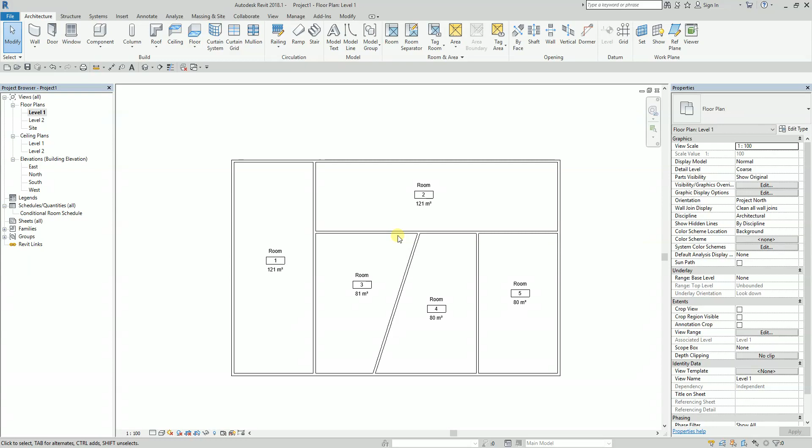Okay, so as you can see here, this is, let's say, my old project. So as you can see, like my last exercise, I do have here a conditional room schedule that shows some required area wherein you can type the value, and then the checker here, and then the percentage of total. Okay, so this is actually the last schedule that I created last time. If I check here the fields, here's the field. So I do have here the required area, which is this one.

So if I check here the parameter, I just created a new parameter named required area, and the discipline is common, type of parameter is area. And it's under the rooms. Okay, and it's an instance. So that is for the required area. I just changed the name here to client's required area, so you can type in here the value. And then this is actually the default field, the area from this portion here. There you go, there's the area. I got it from here.

And another custom field here is the checker. So if I check that one and edit the parameter, as you can see, this is the name of my calculated value, and then this is the formula. So the formula says that if the required area is less than the area, the checker will put OK. If the required area is more than the area, the checker will put X, colored orange. Okay, so this is actually the schedule that we created last time.

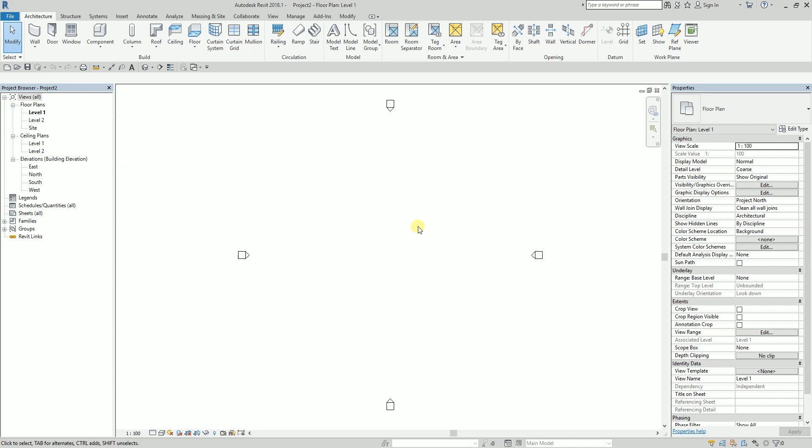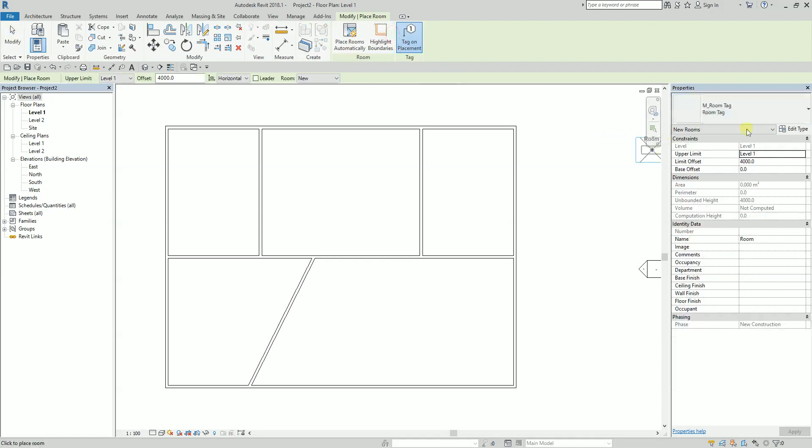Okay, now to be able to copy that, it's not that difficult. Let me just first create some walls, and then after that I'm going to put some partitions. After I put the partitions, I'm going to include also the room. Okay, so there's a partition, and then from room and area, I select room, click the drop down arrow, so there's the room tag with area. Let me just place it here, here, here, and here. There you go.

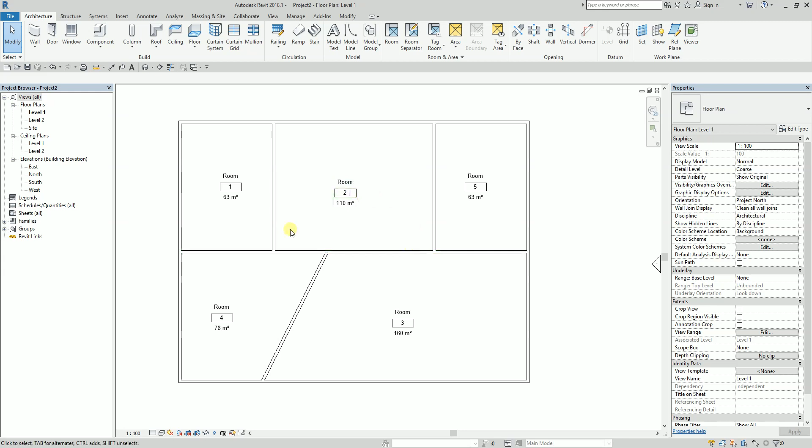Now I want to have the schedule like what I have in my last project, which is this one. So you just need to simply right click the schedule. If you want to copy this, just right click and you can see there copy to clipboard. It's not difficult. So just copy to clipboard and then go to your project 2, which is this one. And then the next thing that you need to do is go to modify and look for paste from clipboard. Okay, there's an issue here if you select the 3D view.

Okay, so paste from clipboard is still there. Before you'd not be able to find it, but I think in this new version you'll be able to paste it now, even if your view is on the 3D view. Okay, so there you go. After you copy to clipboard, you go to your new project, which is this one, and then paste from clipboard.

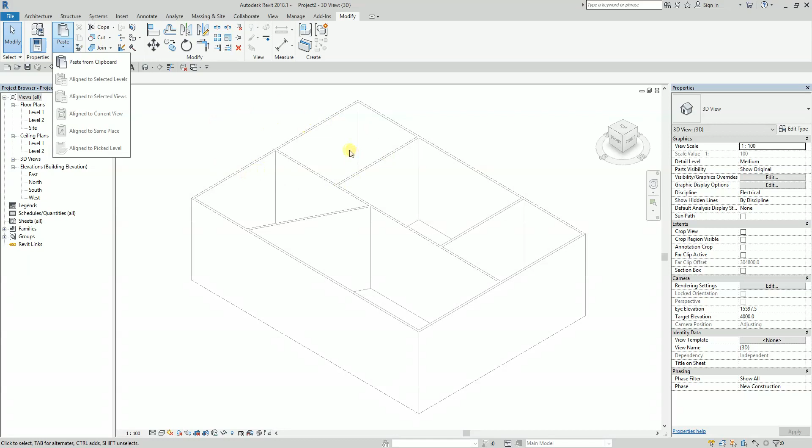So you just need to select that one, and there you go. So there's your schedule now. It's now here, right? So no need for you to recreate your project. Okay, so it's all there. And one good thing, all the parameters are here. It creates the parameter, I mean the field, that you just created in your old project schedule.

Okay, so let's say I'm gonna put here 70, so that is more than, so it becomes X. Let's say I put here 100, so that is less than the area, it becomes yes or okay, right? So basically that's how it works. Okay, so it's working. So that is one way of having your schedule copied to your new project.

Now another way is that, let me try this one. Let me try a new one. Let's say mechanical template. Okay, so let us try to do the other option. Let me just close this one first. Okay, so let's say this is the first project. We want to copy this schedule. So let us try to go to the file. This is another way. So let us try if this will work.

Okay, so if I want to insert that schedule, I go to insert, insert from file, insert views from file, and then let's look for our exercise there, this one, and then I select open. There you go. So I just need to select OK, and then just override the duplicate. So it's just normal. There you go. So that is another way of copying your schedule to a new project. Okay, never mind the other one.

The other one is I exported the schedule to the Excel file. Now, this is the second option that you can use if you want to copy a schedule from your old project to a new project. The first one is you just simply right click and copy to clipboard. You go to the new project, and then paste from clipboard. The other one is you can save it to new file. Okay, all right, there you go. So hopefully you learned something from this video.